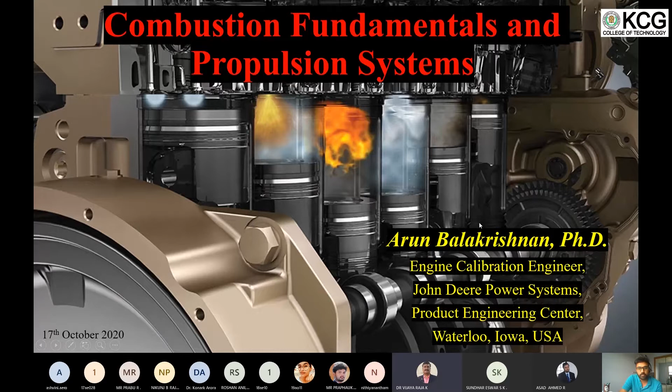Now we are going to talk about the fundamentals of combustion and its application in propulsion systems. So what is combustion, and what are its fundamental pillars? Like any other course such as fluid mechanics or thermodynamics, combustion by itself is a field of science that has application in almost every industry.

The combustion fundamentals can be broadly pillared with three pillars: thermodynamics, fluid mechanics, and chemistry. Combustion is a complex phenomenon with intimate interactions between these three. Chemistry is one part we don't give much detail to in engineering applications, but combustion is this interesting field where you have a combination of physics, chemistry, mathematics, and even a little biology — a complex integration of all the science we would have studied in school.

In terms of thermodynamics, we deal with energy balance - how the energy gets transformed from one form to another during combustion, and flame temperature. On the fluid mechanics side, we look at flame propagation, types of flame, how reactants diffuse and atomize, and how aerodynamics occurs in any combustion system.

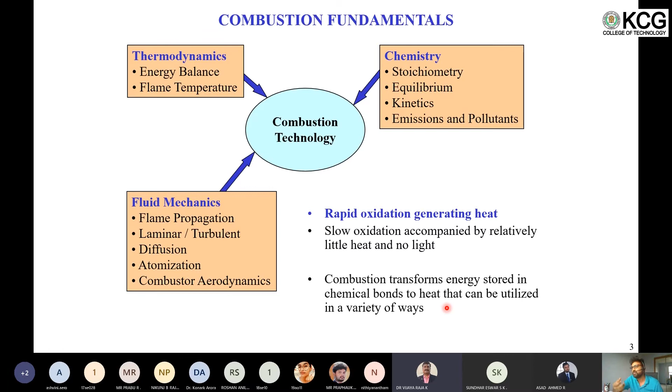It's basically an energy transformation process where energy is transformed from the chemical bonds present in the fuel to heat that can be utilized in a variety of ways. So it's a transformation of chemical energy to heat energy, and then we use that heat energy for a variety of applications.

I'm not going to go into a lot of technical details, but even to explain what I'm trying to say, I need to go through some basics to make sure we all know what we're talking about. So, stoichiometry - as I said, it's the amount of oxidizer required to oxidize a given amount of fuel. This is the stoichiometry for any hydrocarbon-air combustion.

A hydrocarbon is basically CxHy - carbon and hydrogen. It could be methane, ethane, propane, butane, diesel, petrol, gasoline, or even biofuels - they are also hydrocarbons. So for burning a given amount of hydrocarbon, we need some sort of oxidizer - in this case, air. We could also use just oxygen as the oxidizer.

This is basically the basic combustion equation, where fuel reacts with air to form carbon dioxide, water, and nitrogen, since nitrogen is a non-reactive gas. This is the calculation of how much air is required to burn a given amount of fuel. For methane-air combustion, 1 mole of methane reacts with 2 moles of oxygen to form 1 mole of carbon dioxide, 2 moles of water, and nitrogen. When combustion occurs completely, the final products are carbon dioxide and water. If there is incomplete combustion, that's when we form carbon monoxide, unburned hydrocarbons, or soot.

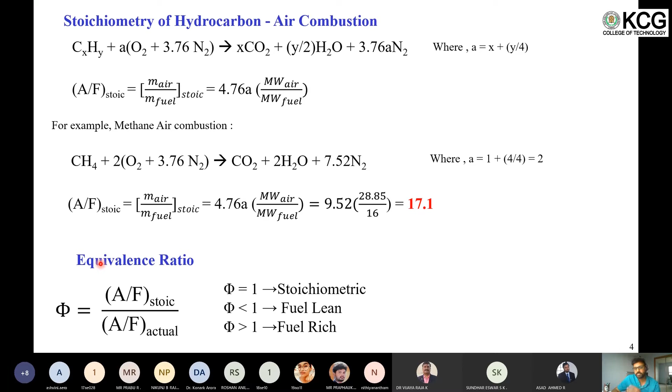So let's get into the aspects of combustion. There are a few key terms that we need to know to understand what the combustion process is, especially when we deal with fuel and how to utilize the energy present in the fuel for any combustion applications.

While trying to understand the combustion process, a very important phenomenon to know is the flammability limit. We need to have a good idea of fuel to understand its application. There are different fuels: diesel, gasoline, methane, hydrogen, used in many combustion systems. To understand and utilize these, we need to understand what flammability limit is. Flammability limit is basically a definition of how much fuel and oxidizer, the ratio of fuel and oxidizer, should be present in the system for combustion to occur.

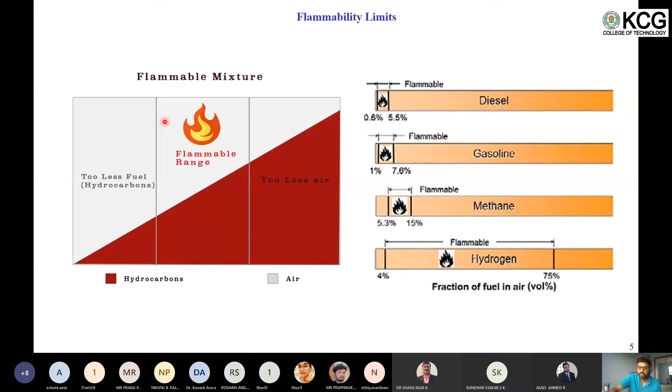Probably you've studied this in chemistry classes. Basically, this is the equation that represents the reaction rate, or reaction progress, in any chemical system. So how do we represent combustion?

Like you would have studied in thermodynamics class, the definition of temperature - temperature is nothing but the degree of randomness, or the frequency of particles colliding in an environment. When temperature increases, that frequency increases. So this is that frequency.

EA is called the activation energy - how much energy is needed to initiate this chemical reaction. And T is the temperature of the system.

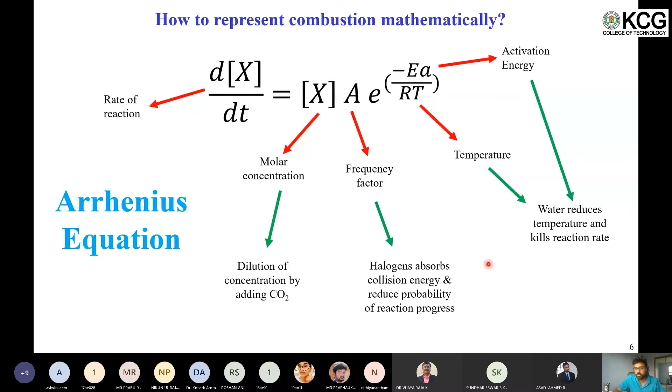We need a good understanding of this system to design one that can either sustain combustion or, if the objective is to put out a fire, extinguish it. This is a whole industry most of us haven't heard about: fire extinguishing. It's a big industry because about 5 to 10% of the earth's landscape suffers from fire hazards. All the forest fires you hear about in the news are a big contributor to climate change, so this is a whole different application for combustion.

Now let's talk about different types of combustion modes. First, there are two types: flame combustion and flameless combustion. Flameless combustion is a higher-end topic, so I'm not going to talk about it in this webinar, but if you're interested, you can Google flameless combustion—it's a pretty cool and interesting topic.

For flame combustion, there are two types of flames: premixed flame and diffusion flame. But before classifying the flames, let's define what a flame is in technical terms. A flame is a self-sustaining propagation of a localized combustion zone at subsonic velocities. I underlined 'localized' and 'subsonic'—those are the keywords in the definition.

You cannot call any combustion process a flame. For a combustion to qualify as a flame, it needs to be a localized combustion zone. The flame occupies only a small portion of the mixture—it starts from one end and propagates, sustaining itself by traveling at a subsonic velocity. So it is a combustion wave that propagates at a localized phase.

If a combustion travels subsonically, we call it deflagration. If the combustion wave travels at supersonic velocity, that's called detonation—that's what we usually talk about when we read about ramjet and scramjet combustion. But the fundamental mechanism for these two is totally different, which is a topic for another day.

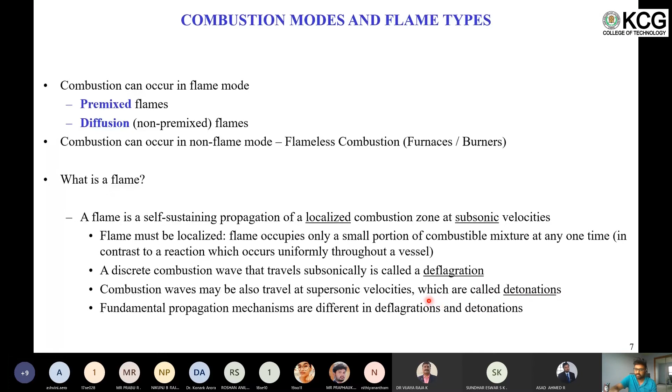Let's talk about premix flames. Flames can be classified into several categories: premixed vs non-premixed, and laminar vs turbulent. Premixed and non-premixed are classified based on how the reactants mix. If the fuel and oxidizer mix before combustion occurs, it's called premixed. If they mix at the interface of combustion, or at the combustion wave or flame, it's called non-premixed or diffusion—there the fuel and oxidizer primarily mix based on molecular diffusion.

Based on laminar and turbulent: if the flame characteristics don't change with respect to time, it's a laminar flame; if they change with time, it's a turbulent flame. This is a Bunsen burner flame—here the fuel and oxidizer mix before combustion occurs, already mixed in this part of the burner, and when it comes out it burns. This blue region is the premix flame, and it's laminar because the flame characteristics don't change with time—if you take several pictures, they'll look the same at the frequency of combustion.

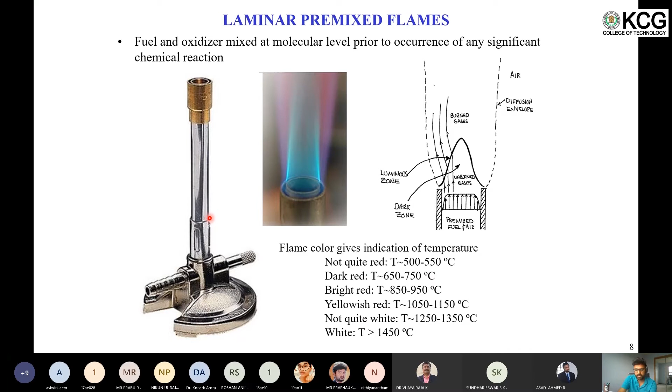Based on the color of these flames, you can identify the temperature. There are infrared detectors that can detect temperature based on flame color. This is a different laminar premix flame—you can see the white color is the highest temperature. This is a flat flame burner.

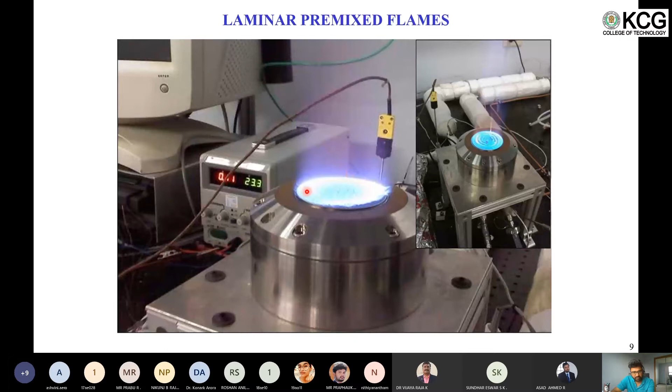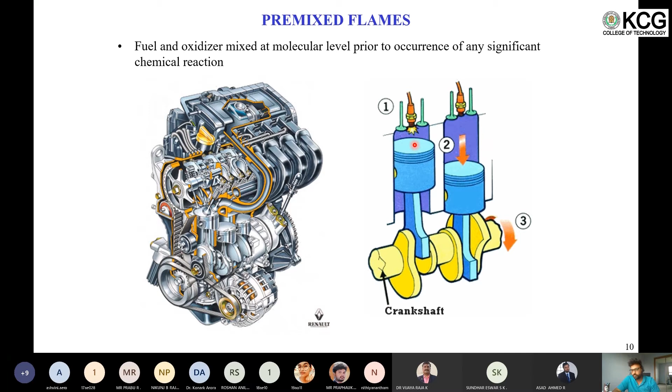We talked about laminar flame, but what's the real application? The primary or classical example of a premixed flame is our petrol engine, otherwise called a gasoline engine. The fuel and air, called the charge, is injected into the cylinder in a gasoline engine, compressed during the compression stroke, and ignited using a spark plug. So the combustion mode here is premixed combustion—it's a classical example of what a premixed flame is.

Now let's talk about diffusion flame. A classical example of a diffusion flame is a candle flame.

Here you can see that the fuel is the wax, which when it is heated up, melts and transfers from solid phase to liquid phase and then vapor phase before it gets entrained in the flame. So this is the diffusion flame.

Here you can see only the fuel is coming out of the burner and the air is coming through entrainment. The orange flame is the region of soot luminosity and the blue is the chemiluminescence. Based on the colors, you can identify how these flame regions are. So this is an example of a turbulent flame.

Primarily diffusion flames tend to be turbulent. The reason is when the air is entrained into the flame, it introduces vorticity into the flame, which eventually makes the flame turbulent. So, an application of diffusion flame.

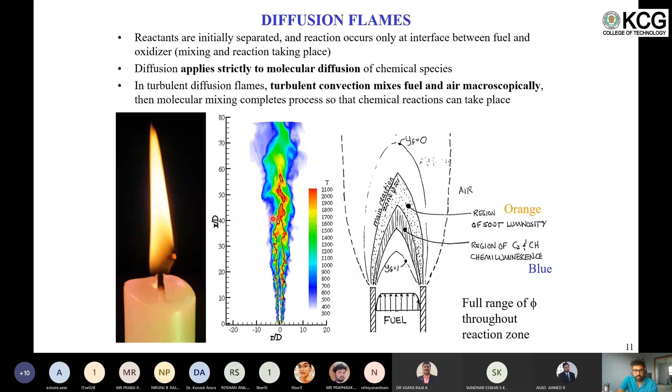Here's another fun fact. Inside the earth, whenever you have a candle flame, it looks like this, irrespective of whether you have the flame up front, or the candle horizontal, or even if you bring the candle downwards, the flame always tends to go upwards. The reason for that is the gravity present on earth, and basically two competing forces: the gravitational force because of the earth's gravity, and the buoyancy force, which compensates the gravitational force. So the buoyancy force is what keeps the flame like this, due to the competing gravitational and buoyancy force.

Whereas this is what we call microgravity combustion. In the absence of gravitational force, or in a minimal gravitational force, a flame tends to look like this because of the absence of buoyancy.

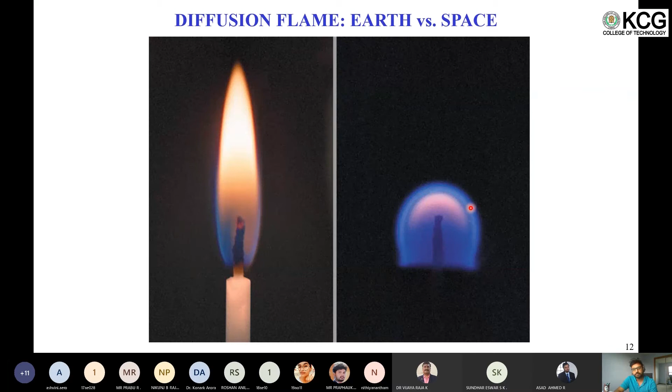So now, what's a fundamental or classical example of a diffusion flame? It's diesel engine combustion. In diesel engine combustion, we don't premix air and fuel. The diesel alone is injected into the cylinder and compressed, and then because of its auto-ignition temperature, the diesel burns by itself. This is a schematic of how a diesel engine flame looks like. I'm not going to go into details of these, but this is how a diesel flame looks like.

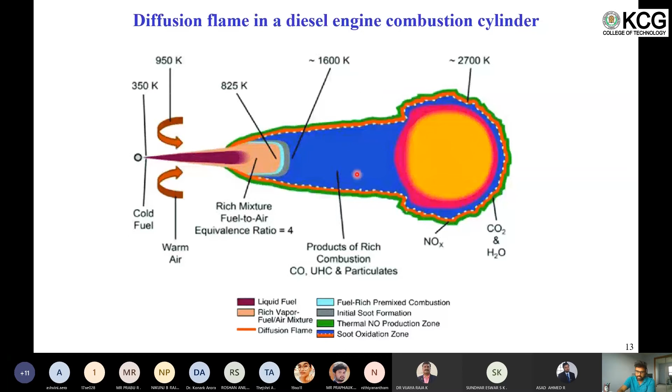Now, if we come back and look at the burner, we mentioned that this is the premixed flame, right? You can see that there is another region on the outer periphery of the flame. It's nothing but a diffusion flame. So this is what we call a partially premixed flame.

In any practical application, what we come across is a partially premixed flame. What I mean by that is fuel and oxidizer is already mixed here, but not all of the fuel is burnt within the premixed zone. So there is some unburnt fuel that crosses this zone, and then it meets the air from the ambient environment to burn. So the outer periphery of the premixed flame becomes a diffusion flame. This is the most practical combustion system, how it works.

So now, before we proceed, let's try to answer some questions. Why is it that all these flames look like a cone? What determines the shape of the flame? The primary factor that determines the shape of the flame is the velocity profile and the heat loss to the tube wall. Even in our fluid mechanics class, we would have studied this.

The velocity distribution on a circular jet is always a normal bell distribution curve, so usually the distribution goes like this. It's the same thing - if in a non-reacting mixture you get a normal distribution curve, the same applies with the reacting mixture. When I say reacting mixture, it's the mixture that reacts within itself. Because of that, you tend to get this profile.

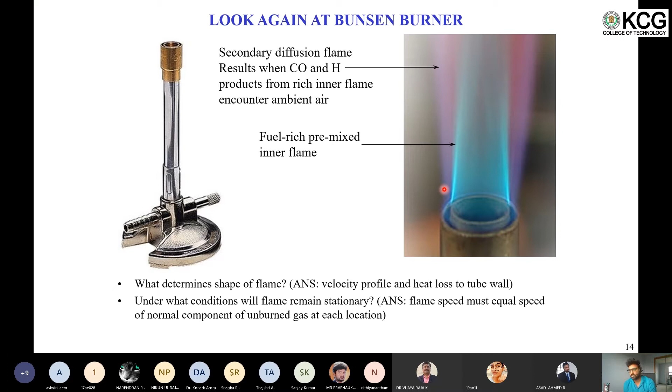For the flame to be as stationary as possible, we need to equalize the jet speed coming out of the burner. The unburned gas coming out of the burner should equalize the flame velocity. If that doesn't occur, there are two unfavorable phenomena in any combustion system: one is called blow off, the other is called flashback. Flame blow off versus flashback.

Blow off is when the unburnt gas mixture, or reactant mixture, coming out of the burner has a velocity higher than the flame propagation speed, which tends to push the flame out of the burner. That's when combustion becomes unstable, your flame gets blown off, and you start puking fuel into the combustion chamber, which is both a safety hazard and an operational hazard. Flashback is when the flame velocity is higher than the gas velocity, or the reactant mixture velocity, so the flame tends to travel back inside the combustion chamber.

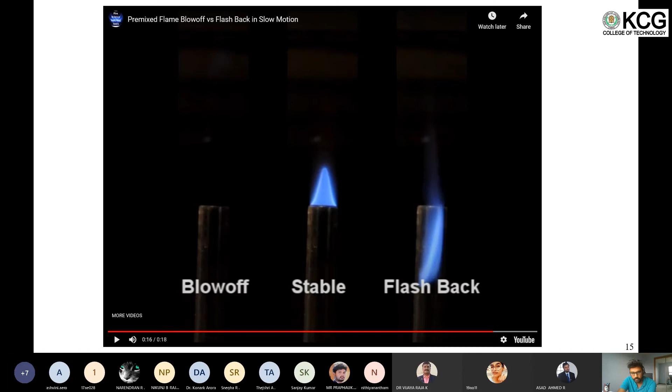Now let's go back to the next slide. With the basic fundamental knowledge of combustion, let's get into the application of combustion propulsion systems.

In propulsion systems, I'm going to talk about a wide variety of propulsion systems. The first one is the car engine, the spark ignition engine, otherwise called the gasoline engine. I won't go into the details of how it works mechanically, but how combustion occurs. During the intake stroke, air and air-fuel mixture, since it's a pre-mixed flame, gets injected or sucked into the cylinder, is compressed, burned during the combustion stroke, and then during the exhaust stroke it's exhausted and vented out. So spark ignition is a classical example of internal combustion.

We divide propulsion systems into different categories, one being internal versus external combustion. Internal combustion occurs within an enclosed space, like in a diesel engine, where air is pulled or sucked into the cylinder and compressed, and then because of auto-ignition temperature, the fuel gets burnt, and the power stroke occurs.

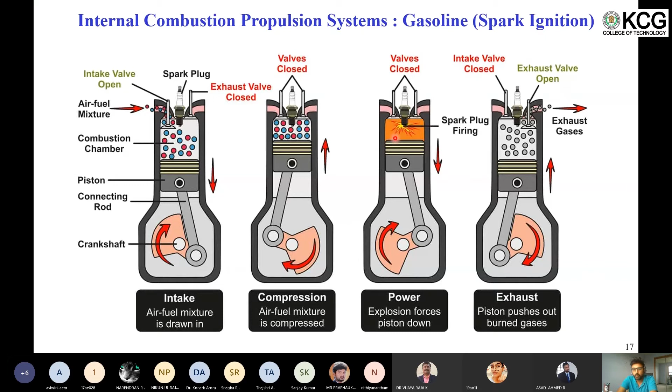Whereas in a diesel engine, the flame can occur anywhere in the system. It doesn't have to propagate from the spark plug. It could occur anywhere within the system, and it can expand through the entire combustion chamber. That's the reason we call diesel as compression ignition. We achieve ignition through the compression process, and this is also called controlled detonation, because you're basically creating an explosion, but in a controlled manner.

That's the reason diesel engines always require much more robust infrastructure to operate than a gasoline engine. That's why gasoline engines are lighter than diesel engines, but diesel engines have a higher compression ratio, which leads to higher combustion efficiency. That's the reason we always get higher mileage for diesel than gasoline.

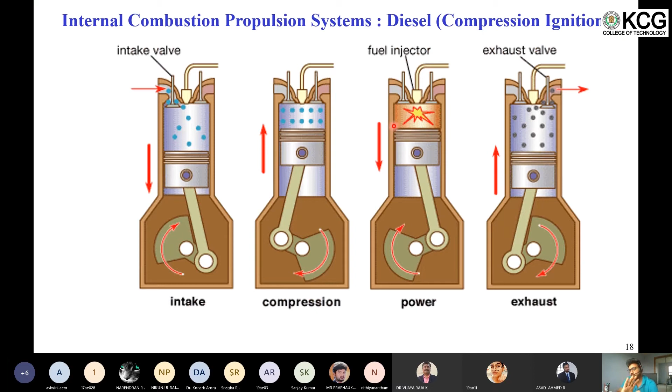That's a pretty wide and deep topic to talk about, just the gasoline engine and diesel engine, but this is just to show application of internal combustion.

Now let's talk about external combustion. External combustion means your combustion still is in an enclosed space, but it is not defined by a fixed control volume. Here the flow of air is continuous and external. So the air is sucked into the engine, then it burns in the combustion chamber and expands in the nozzle.

So there are different types of propulsion systems, as you probably know. I just put the basic ones: the turbojet, turboprop, and turbofan. The fundamental difference between these three engines is the way you draw in air from ambient, or how you achieve the compression process required for combustion. Here we achieve compression through a turbine running a turbojet, here through a turboprop, and here using a turbofan.

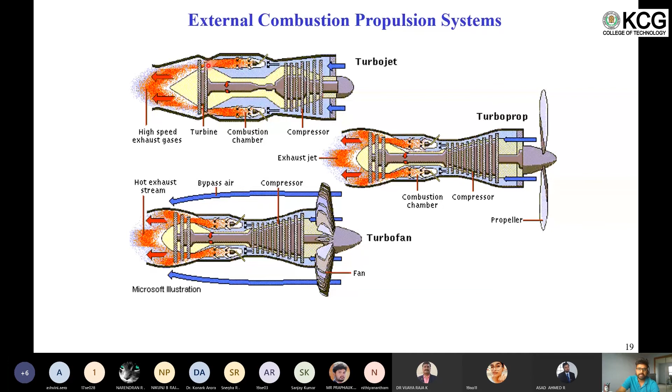But once it crosses this area and gets into the combustion chamber, the fundamental combustion phenomena is the same. So basically air is sucked in and then burnt in the combustion chamber, then expanded through the turbine and nozzle. Let's go a little deeper into how the combustion occurs.

I think I've taken this from a textbook called Gas Turbine Combustion. Here the air is being sucked into the engine, the fuel is injected, and the air swirler is there. So the combustion chamber can be divided into three areas: primary zone, intermediate zone, and dilution zone.

The primary zone is where the flame is stabilized, localized, and anchored. We use these terms: stabilized, localized, and anchored. Stabilized means it's not going to move around, it's not going to change its combustion frequency. Localized means it's going to stay there, it's not going to move around. Anchored, stabilized and anchored are pretty much the same - anchored means it's fixed there, the flame is going to sit there and burn.

So how is that possible? It's because of the swirler present here that creates a turbulent flow. We call it a turbulent region that anchors the flow. It's basically a backflow that creates a low pressure region here to anchor the flow.

So the presence of that air swirling, the presence of this localized backflow region, allows us to anchor the flame here, and then the bypass air starts entraining into the flame in the intermediate zone.

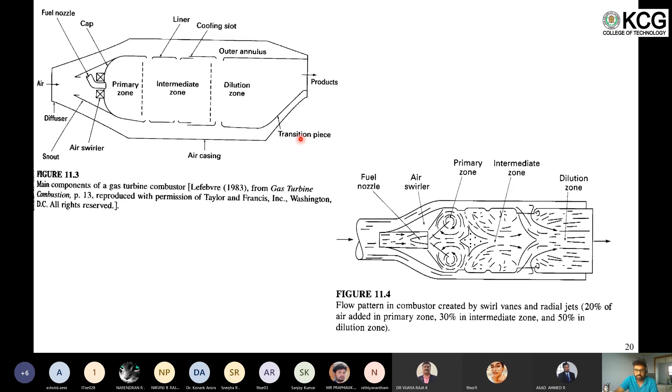This serves two purposes: one is to anchor the flame, the other is to protect the engine lining from overheating. And the third one is the dilution zone, where it brings down the temperature and expands through the nozzle as well as the turbine to create thrust. So this is the basic combustion process that occurs there.

I think I'm running out of time, so I'll try to jump a little bit. Now I want to talk about emissions and pollutants. In the last 10 to 15 years, the whole combustion industry has changed.

Combustion has a pretty good literature, a pretty good history with humankind, right from the caveman. We also have a well established combustion industry that has done a lot of research on combustion for the past 200 to 300 years. But it's only in the last 15 to 20 years that we've talked so much about emissions and pollutants.

Previously we always talked about efficiency, how to burn fuel more efficiently, how to extract energy more efficiently. That was the primary scope back in the 1950s to 1980s. But starting from the 1990s, we put more emphasis on emissions and pollutants because of their effect on climatic change and all the consequences on our weather and climate.

So the major pollutants we worry about are unburnt or partially burnt hydrocarbons due to incomplete combustion, carbon monoxide, and sulfur oxides. Nitrogen oxides joined the club pretty recently, back in the 1990s, because all along we were thinking nitrogen was an inert or noble gas, that it's not going to react. That's what we learned in chemistry. But nitrogen tends to react with oxygen at elevated temperatures to form nitric oxide and nitrogen dioxide. Together we call it NOx.

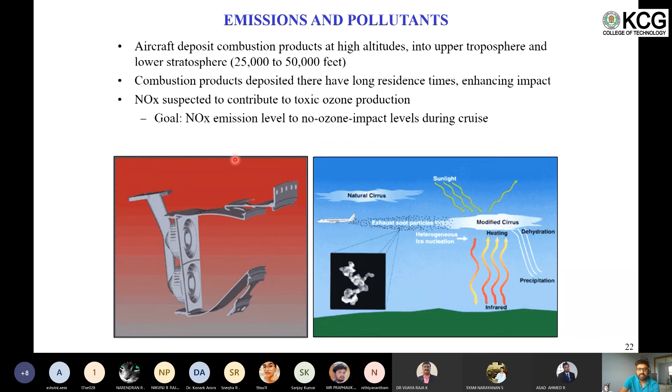So recently, every country has tried to put regulations on how much pollutants you can emit for a given power you are producing. They started putting these regulations beginning with California, USA. Europe is taking a pretty big lead on it now. Probably in the news you would have read about Bharat Stage, BS4, BS5, BS6. For India we call it Bharat Stage, and now we're trying to push Bharat Stage 6.

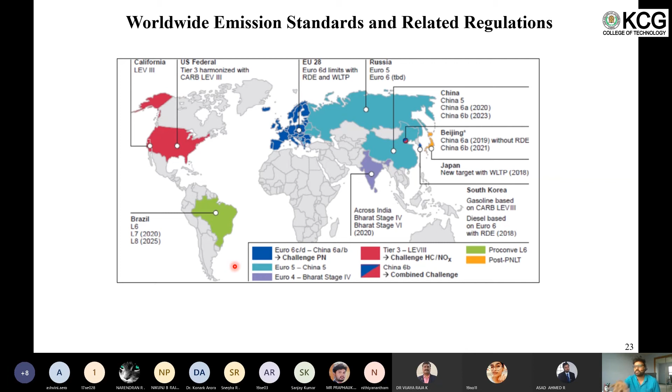So because of all these regulations, we tend to rely on a much better understanding of how to combust fuel so that we extract this energy without doing much harm to the environment. So that's where we as combustion engineers come into the picture, trying to understand the relationship between fuel, oxidizer, combustion environment, and the whole ecosystem of how combustion occurs.

Since we are running out of time, I'm going to show a couple of slides on my PhD work. With my PhD work, I could talk for hours and hours, but because of the time constraint, let me just try to explain the title of what I did.

This is from the Biofuel Combustion Research Lab at the University of Oklahoma, USA, a state called Oklahoma. This is my dissertation title, where I try to understand the effect of fuel unsaturation on pollutant emissions, including soot, carbon monoxide, and nitrogen oxides, from laminar flames of pre-vaporized petroleum and biodiesel blends. So I worked on biodiesel fuels, how to harness the energy of biodiesel in propulsion systems.

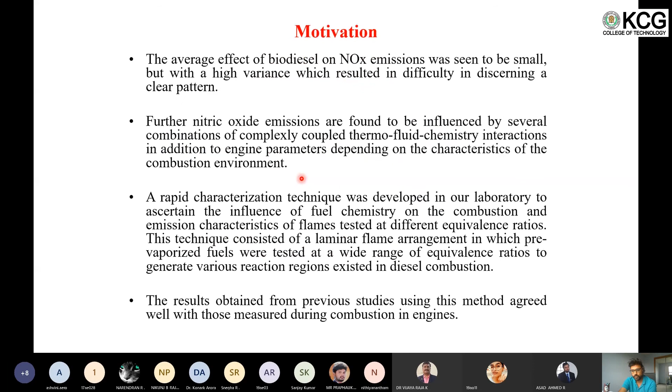On the whole, I tried to understand the relationship between the fuel being used and the combustion environment. I'll skip through some slides to give an overview. Basically, all my research work is on flames, because we try to understand the combustion process or combustion chemical reaction. I emphasized the chemical kinetics occurring in different fuels at different equivalence ratios, meaning for different ratios of air present in the combustion system, how combustion can vary.

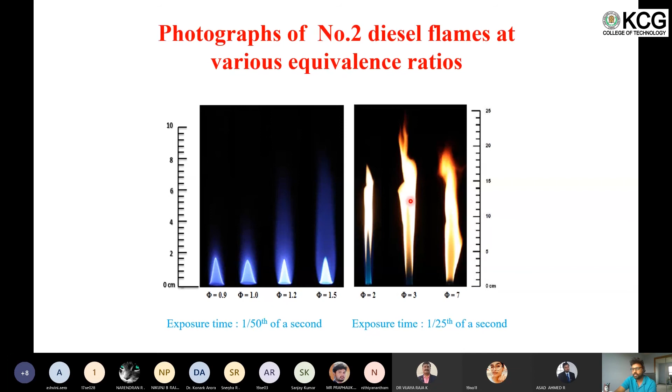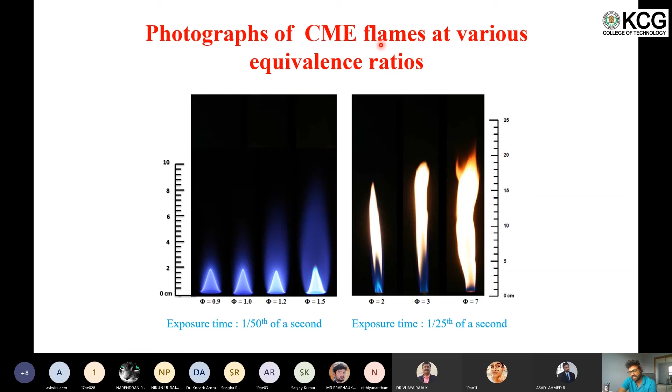So I did the same research on diesel fuel versus PME, meaning palm methyl ester, a biodiesel based off palm oil, and CME, which stands for canola methyl ester, made from canola oil. It's basically a trans-esterified oil.

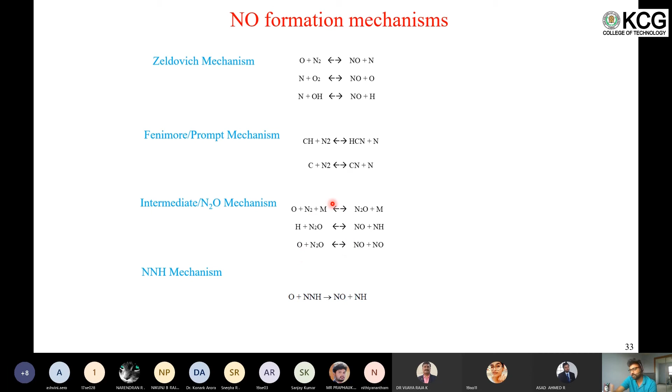So these are the chemical reactions that I studied in a combustion process to understand how nitrogen reacts with oxygen under different conditions. These are different types of mechanisms people have studied before that occur in particular combustion conditions.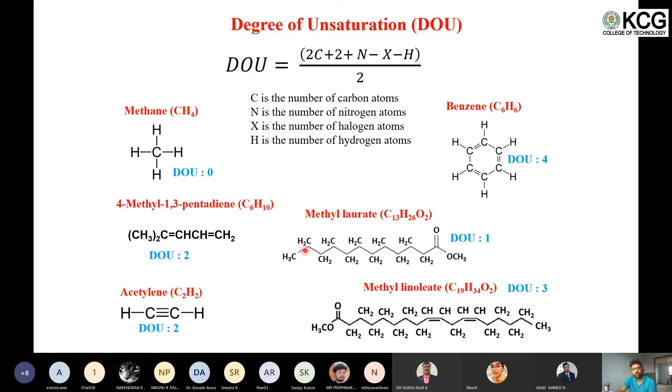So it's a pretty different topic. I'm not intending to discuss all of this, but just to show how much potential we have in doing research on combustion. So by establishing this parameter, what I did is develop this experimental correlation equation.

This is one of the equations from my PhD work, where DOU is the parameter I showed, related to the fuel that has been used. Phi is the nature of the combustion system — basically whether it's a fuel rich or fuel lean environment, depending on how the fuel environment changes.

EI NO is the emission index of nitric oxide. So by understanding what fuel you are using, and what the ratio of the fuel is, we can estimate how much NOx you're going to produce in a particular combustion environment. This is particularly useful.

This sort of relationship is particularly useful because we can predict how much NOx we can produce for any design phase. If you are designing a combustion system for a biodiesel or any fuel, then based on the operating condition of the combustor and the fuel, we can predict how much NOx we are going to emit.

All world countries put a regulation: for producing a given amount of power, you can make only X amount of NOx. Since this is enforced by the regulation agency, we can backtrack — since we know this number, we can backtrack this and this to be in compliance with all those regulations.

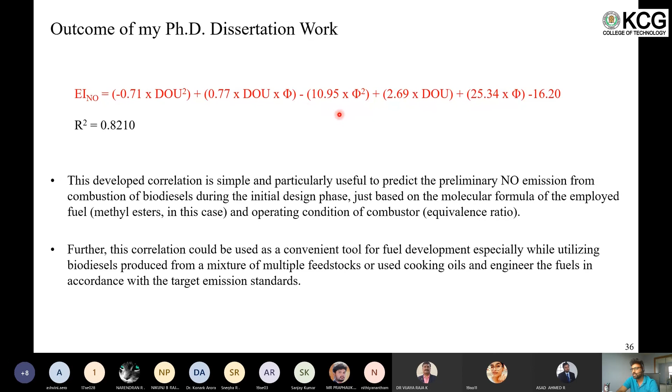So this is the outcome of my research. We published this in about 7 different journals, and I'm still working on 3 more papers to publish the rest of my work. This correlation can be used as a convenient tool for fuel development — for engineering the fuel, particularly biodiesel, this will be a good starting point to understand the fuel chemistry and its relationship to the environment.

So combustion is a pretty open, pretty wide and deep field that still requires a lot of research to better utilize what we have as a combustion process. So now this comes to the conclusion of this webinar, where I want to emphasize, as an aerospace engineer...

This is one specific advantage that we have as an aerospace, aeronautical, or even mechanical engineer — we understand the basic components of how a system works, right? For any system to work, there are basic inputs and outputs for the system.

For a propulsion system to design an aircraft engine, or to design a power plant, or even to design a combustion equipment, even to design a furnace, to design a gas stove burner, for any combustion system to design, we need to have basic understanding of thermodynamics, basic understanding of fluid mechanics, and basic understanding of solid mechanics, because we need to design material to make any of this combustion system to work.

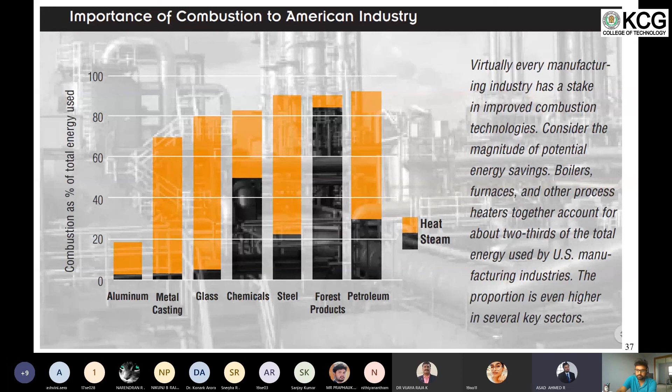Okay Arun, can you just briefly tell, what are the steps required, if somebody wants to apply for a master's in the US, or for a PhD?

First step is you need to have a TOEFL or IELTS. These are basically a test that can prove that you know English at a level where you can listen, speak, write, and read. So that's a basic exam. TOEFL and GRE. GRE is basically an aptitude test to understand that you have the aptitude ability to learn a course.

So TOEFL and GRE, I said recommended, but it's required, sorry. TOEFL can be swapped with IELTS, but I did TOEFL. It's been more than 8 years now, so some things have changed, but as far as I know, these two are still requirements.

Set that aside. In terms of research area, there are two ways you can go: apply for a master's or directly apply for a PhD. Even though I got an admit for master's, after talking with my professor, I converted it into a PhD program, so I didn't have a master's degree. After bachelor's, I directly started my PhD work.

One thing about US universities is the professor has much more power than back in India. In India, the entire admission system decides what courses you need to take for research, but in the US, the professor has a lot to say.